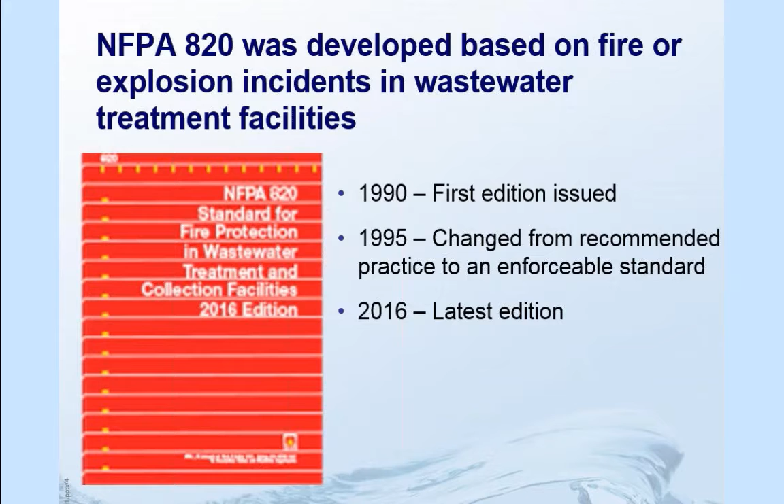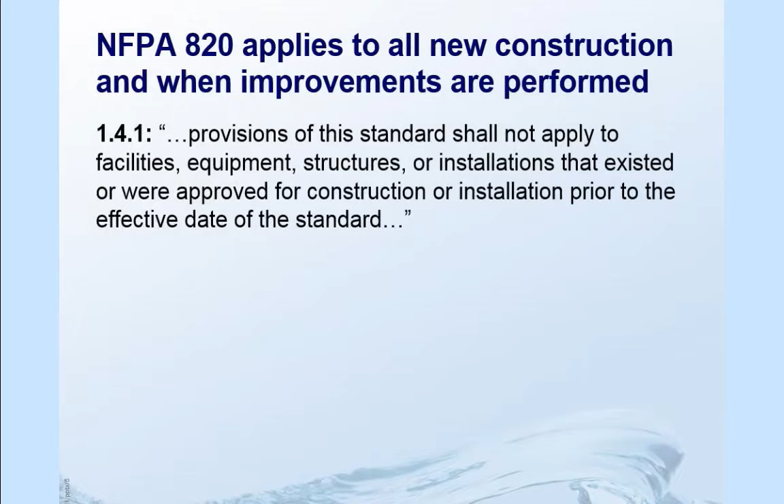So how does NFPA 820 apply, or where does it apply? It is applicable for wastewater treatment facilities and collection systems. But when does it apply? It applies to all new construction and when improvements or modifications are done in a certain area. If you look at Article 1.4.1 of the standard, it says that the provisions of the standard shall not apply to facilities, equipment, structures, or installations that existed or were approved for construction or installation prior to the effective date of the standard. So anything that was built before when the standard was made a standard, NFPA 820 does not apply. And any new work, any new design or construction work that we do now in wastewater treatment and collection facilities, this standard applies. However, there is a little caveat to that.

The authority having jurisdiction may apply any portions of NFPA 820 retroactively. There is an article, 1.4.2, in the standard that says in those cases where the authority having jurisdiction determines that the existing situation presents an unacceptable degree of risk, the authority having jurisdiction shall be permitted to apply retroactively any portions of the standard deemed appropriate. So the authority having jurisdiction for a certain wastewater treatment plant could be the fire marshal of that area, and that fire marshal could look at a certain area inside your wastewater treatment plant and say there is an unacceptable degree of risk in this area, and require improvements to improve safety. So it definitely applies to new construction and new design work, but it can be enforceable on existing structures or existing process areas.

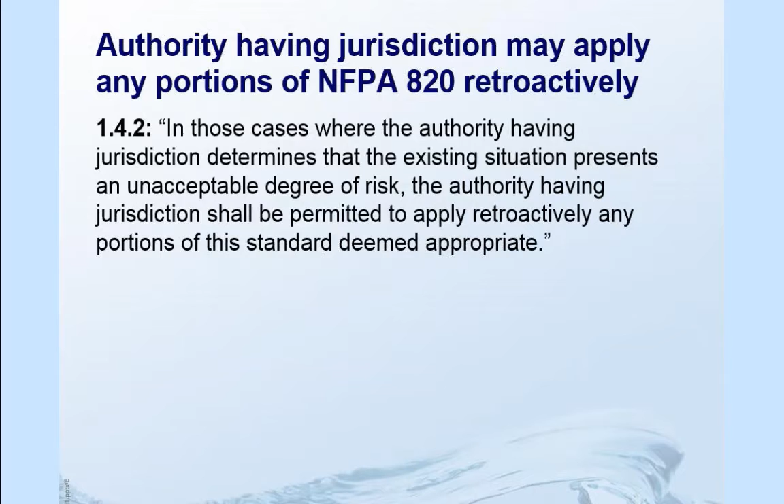So what does NFPA 820 do? The basic function of NFPA 820 is to classify the elements of wastewater treatment and collection facilities. Classify meaning they assign it to a certain class. There are tables in the standard that help you identify the classification of a certain area. So NFPA 820 provides the hazard classification of specific areas and processes at wastewater treatment plants and their associated collection systems.

And what do you do with that classification then? What NEC does is establish the requirements for equipment in different classifications, to minimize hazards, the electrical equipment must be designed in accordance with NEC requirements. So you establish a certain area, say a sludge pump station. What is the classification? After you establish that, you would use NEC to see what are the requirements for the electrical equipment that should go in that area.

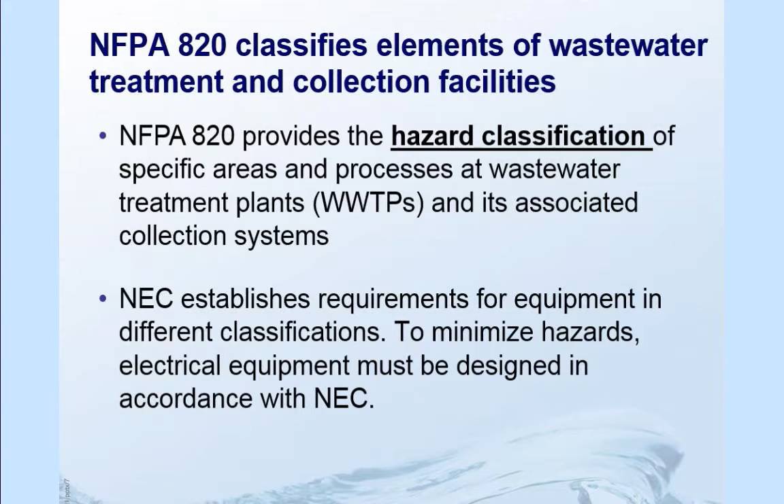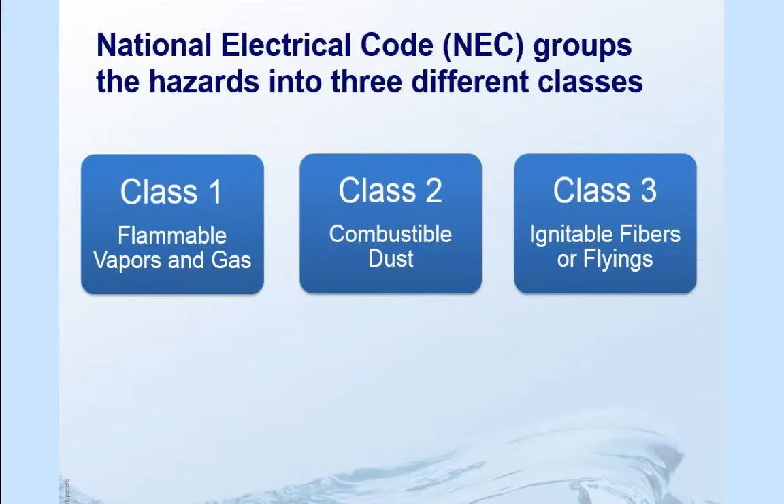So the National Electrical Code groups the hazards into three different classes: Class 1, Class 2, and Class 3. Class 1 deals with flammable vapors and gases. Class 2 is concerned with combustible dust. And Class 3 is all about ignitable fibers and flyings.

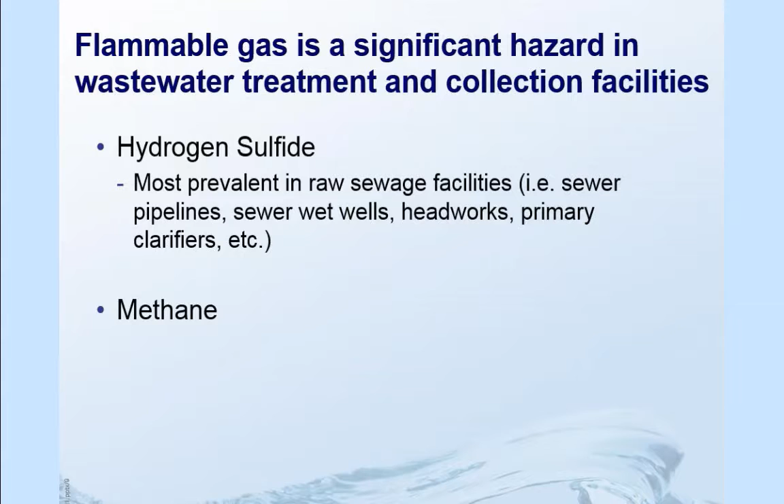Flammable gas is a significant hazard in wastewater treatment and collection facilities. There are two primary flammable gases we encounter: hydrogen sulfide and methane. Hydrogen sulfide is most prevalent in raw sewage facilities like sewer pipelines, sewer wet wells, headworks, and primary clarifiers. Methane is most prevalent in sludge handling and digestion facilities like digesters, sludge thickeners, and sludge storage tanks.

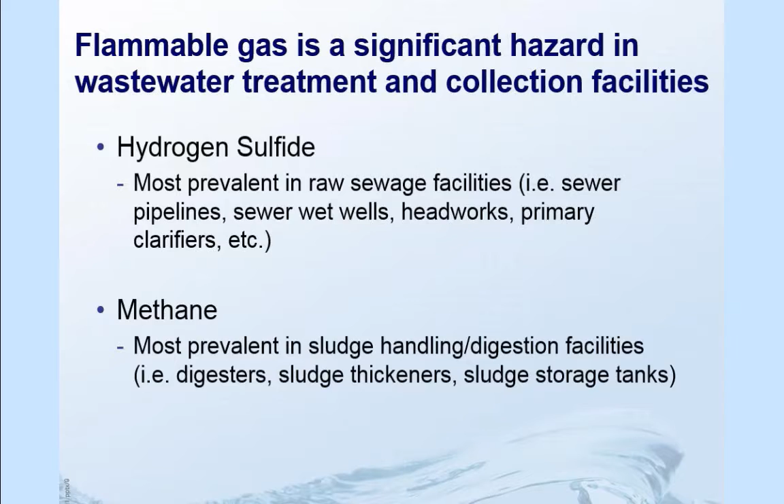Since flammable gases are the major hazard in a wastewater treatment plant, Class 1 is the primary category for wastewater treatment facilities. So the spaces in wastewater treatment and collection facilities fall primarily under Class 1.

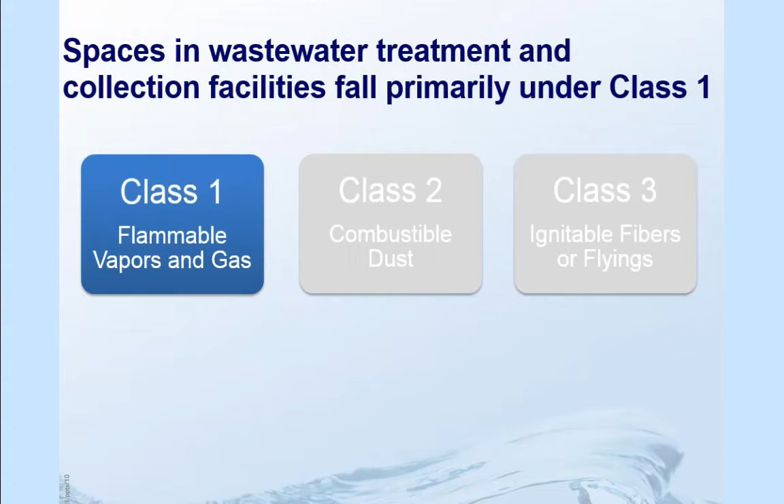Then NEC further classifies Class 1 into three divisions: Division 1, Division 2, and unclassified. Anything where the hazard is present during normal plant operations is put under Division 1. Division 2 includes hazards present during abnormal plant operation—like normally nothing's a hazard, but if there's an abnormal event, like a leak at a valve, the gases coming out of that leak could create a hazardous situation. Those areas are put in Division 2.

And then there are areas that are unclassified because they don't present any hazard during normal operation. So going through NFPA 820, you would see every process area is classified as Class 1 Division 1, Class 1 Division 2, or unclassified. You will see these three terminologies repeated throughout the NFPA 820 standard.

Then NEC establishes requirements for electrical equipment for these classes. If an area is Class 1 Division 1, you would have to use explosion-proof enclosures, and you would need conduit seals at the interface between classified and unclassified areas. If a conduit is crossing from an unclassified area to a classified area, you would need a conduit seal there. Similarly, for Division 2, there are some specific requirements.

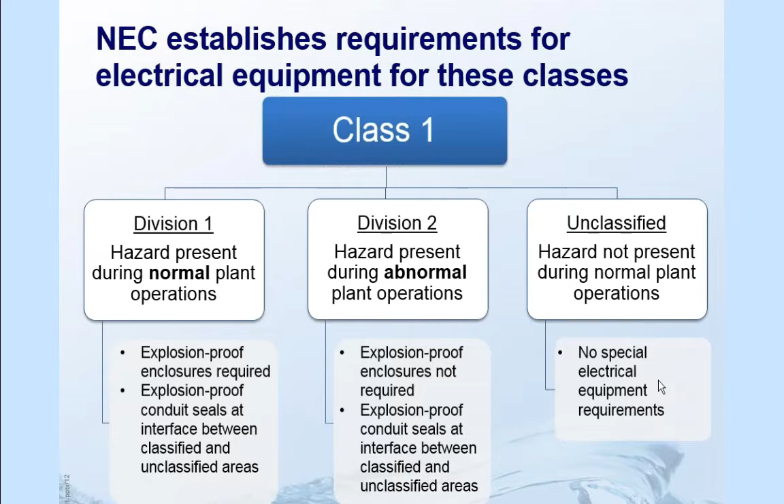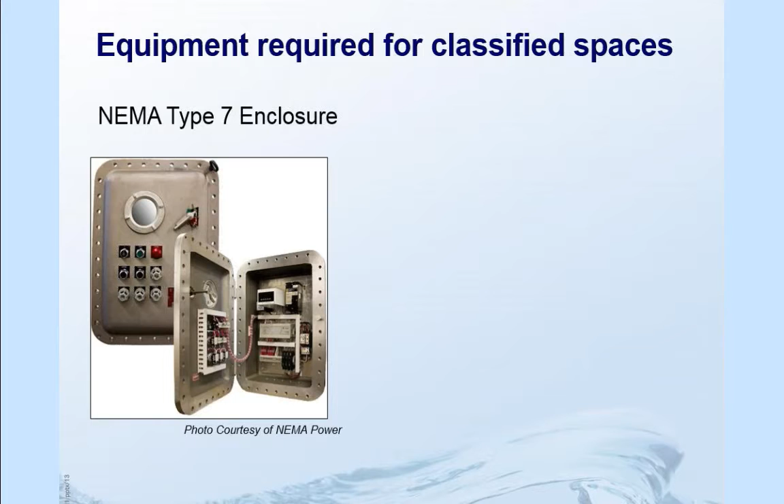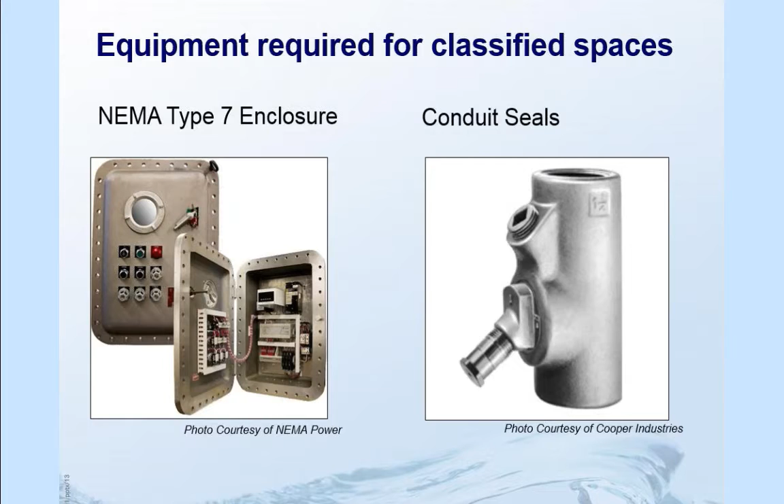This slide shows the equipment that would be required for classified spaces. The photo shows a NEMA Type 7 enclosure, which is an explosion-proof enclosure. The design allows an explosion of a certain intensity to be contained within the enclosure and not leave it. There is also a picture of a conduit seal—this is the seal you would put on conduits when they cross areas of two different classifications, from a classified area to an unclassified area, so that gases don't travel inside the conduit from one area to the other. They're sealed off.

So how do explosions or fires occur? For an explosion or fire to occur, flammable gas and vapor concentrations must be within its lower explosive limit and upper explosive limit, combined with an ignition source.

Lower explosive limit is the concentration of flammable gas or vapor in air below which the gas atmosphere is not explosive. Similarly, the upper explosive limit is the concentration above which the gas atmosphere is not explosive. So the gas concentration in the atmosphere has to be between these two limits, and there has to be an ignition source for an explosion to occur.

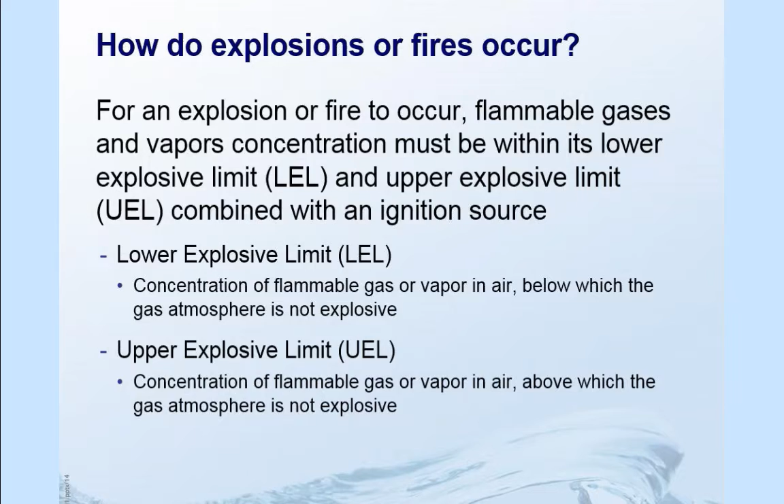Explosive limits of certain gases and vapors commonly found in wastewater treatment plants are shown on this slide. There are four commonly found gases: hydrogen sulfide, natural gas, sewer gases, and sludge gas. The second column shows the lower explosive limit, and the third column shows the upper explosive limit.

For example, with hydrogen sulfide, if the concentration in the atmosphere is between 4 and 44, say 10, and if there is an ignition source, then there is a possibility of an explosion.

A couple things about the sewer and the sludge gas. The sewer gas is defined by the US EPA as gas that contains 5% methane and 25% other gases. Sludge gas is defined as gas that is 65% methane and 5% other gases.

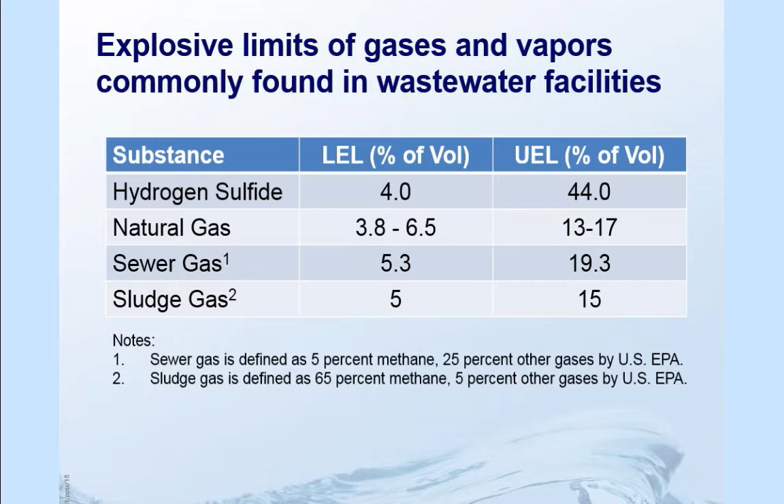So what are the typical sources of ignition in a wastewater treatment facility? There are sources that are from the equipment itself, and there are from maintenance activity.

From equipment, it could be hot surfaces, like boilers, generators, engines, or stray electric currents from conductors, wires, and switches, or sometimes mechanically generated sparks from movement of mechanical pieces like actuators, grinders, and pumps. And maintenance activities...

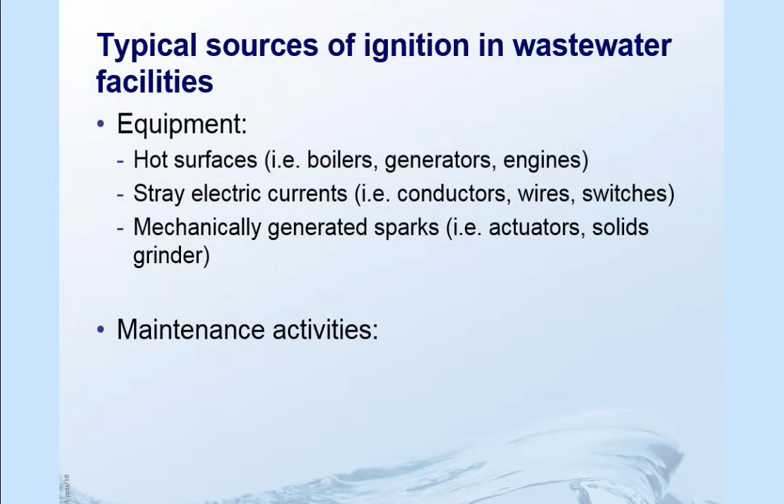like sparking tools or static electricity could actually create an ignition. So the gas concentrations put together with the source could be a hazard, could produce an explosion.

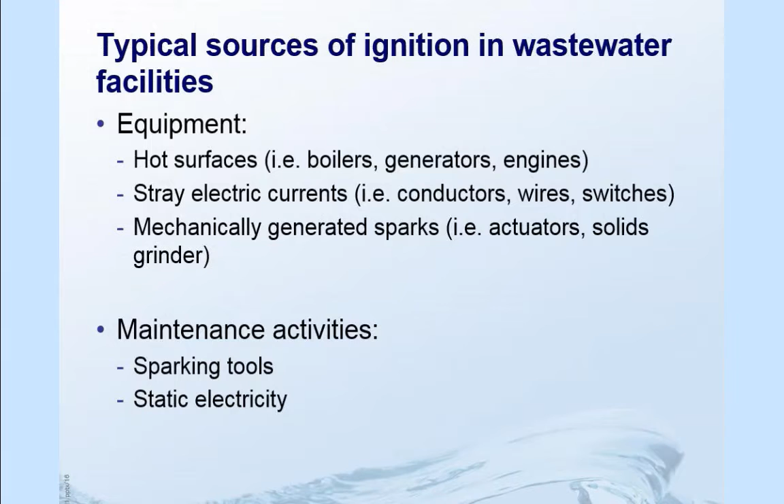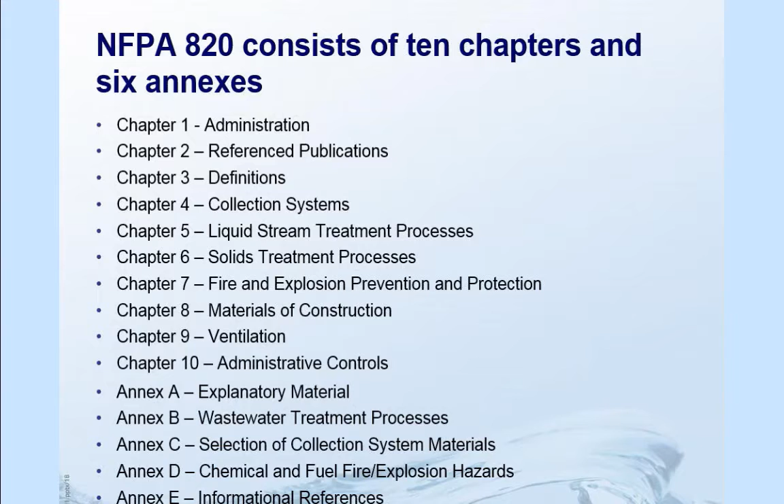Chapter 4 deals with collection systems. Chapter 5 deals with liquid stream processes. Chapter 6 with solid treatment processes. Chapter 7 is about fire and explosion prevention. Chapter 8, materials of construction; 9, ventilation; and 10, administrative controls.

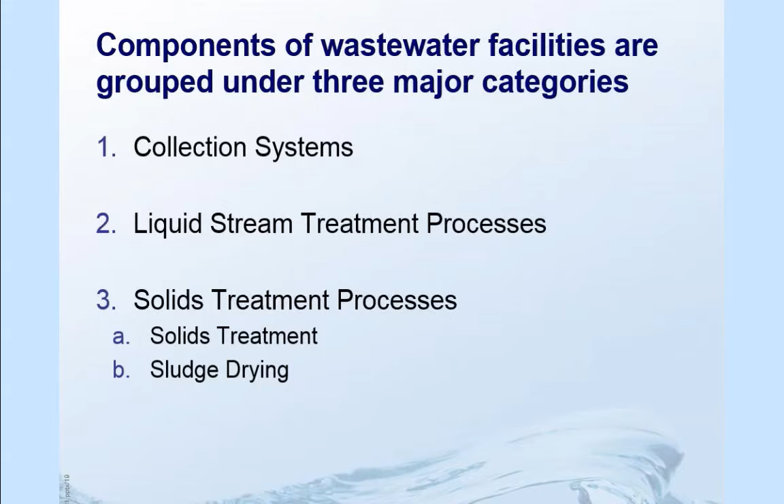So as you saw from the table of contents, the components of wastewater treatment facilities are grouped under 3 major categories by NFPA 820. They are grouped as collection systems, group 2 is liquid stream treatment processes, and group 3 is the solid treatment processes. Under solids treatment, it is further divided into solids treatment and sludge drying.

So what is included in the collection system? Collection system includes off-site facilities related to wastewater, that is stormwater and sewage collection and transport systems. So these would be your wastewater sewer lines, wet wells, lift stations, and structures like that, outside the fence of your plant in the collection system.

And table 4.2.2 of the standard covers collection system components.

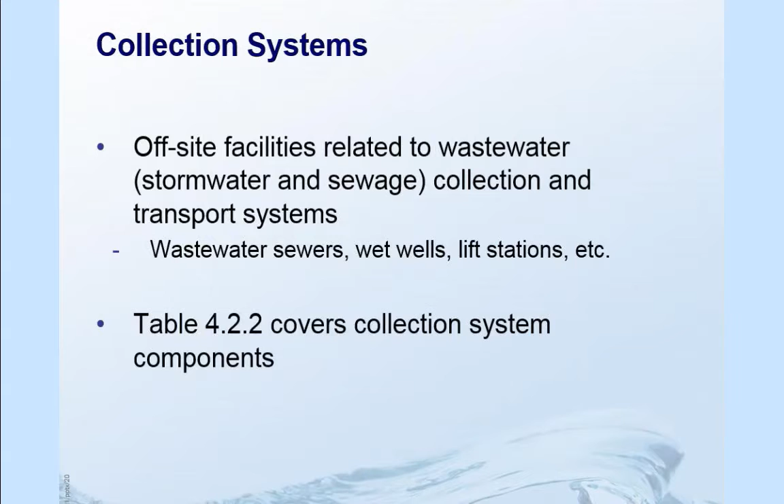Then the second group is the liquid stream treatment processes, which includes on-site facilities related to wastewater liquid treatment. So this would be structures or processes inside the treatment plant fence, which would be the headworks or the EQ basins or the primary treatment or the secondary treatment trains. All these structures that deal with liquids treatment inside a treatment plant are dealt with under the liquid stream treatment processes. And table 5.2.2 of the standard covers liquid treatment system components.

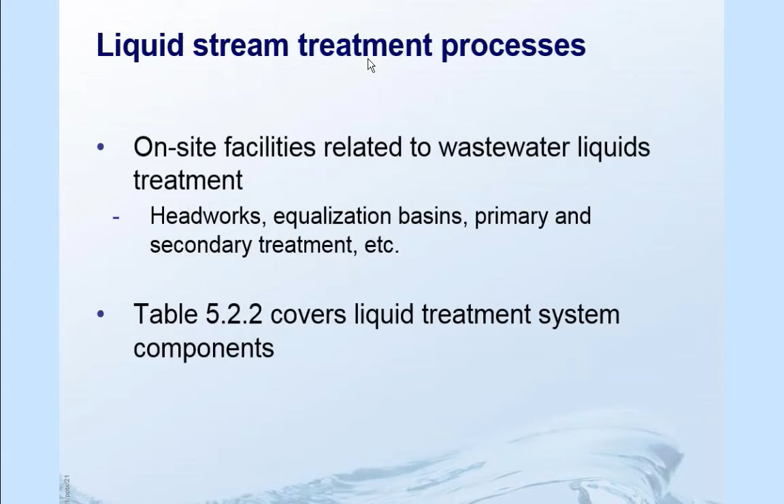And the third group is the solid treatment processes, which includes on-site facilities related to wastewater solids handling and treatment. So these are your treatment processes that deal with the solids, such as the grit and scum handling from the headworks, the primary and secondary sludge, your digesters, or any gas handling systems used in solids treatment processes. And then it also includes the sludge drying and sludge storage areas.

And table 6.2.2a deals with solids treatment components, and 6.2.2b covers sludge drying components.

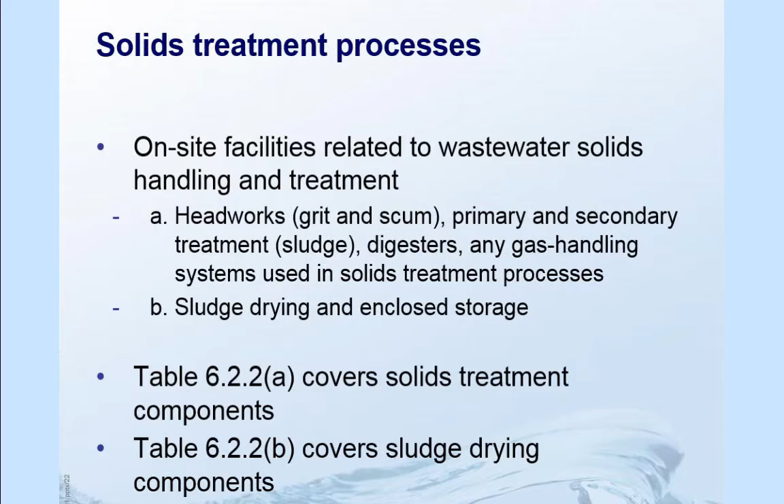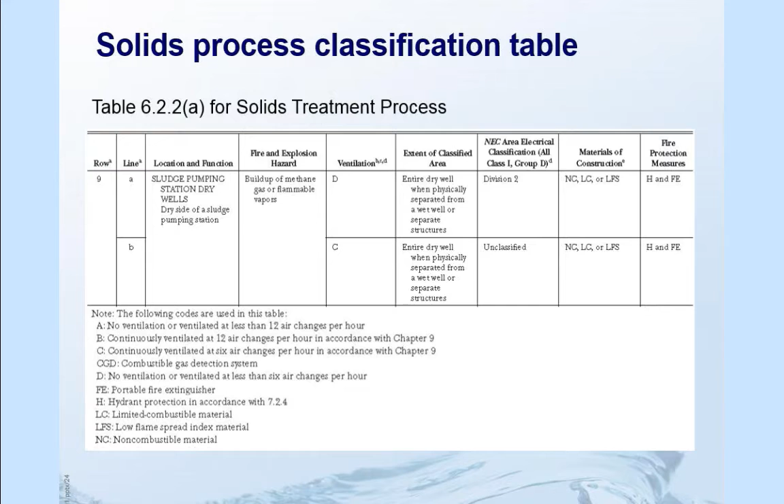So what you would do is you would start with the area that you are concerned about. It depends upon the location and function of the area, so you will select the applicable row. If you go back to that table, there are rows for different areas. This happens to be for the dry side of the wet well. There is this area for maybe the wet side of the wet well.

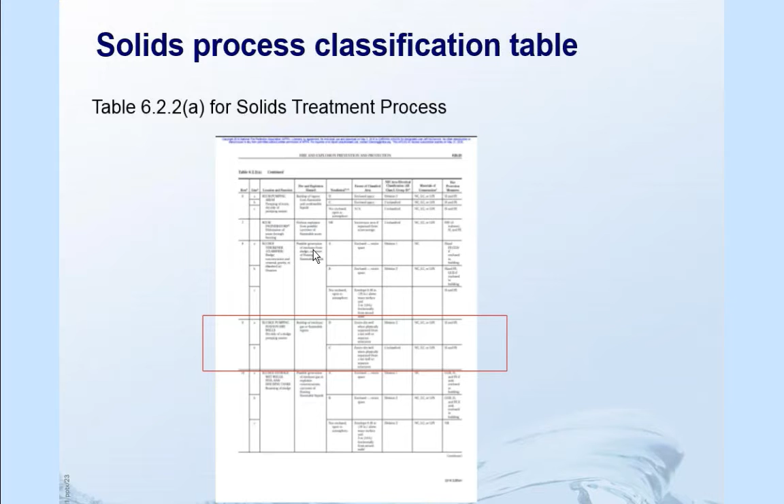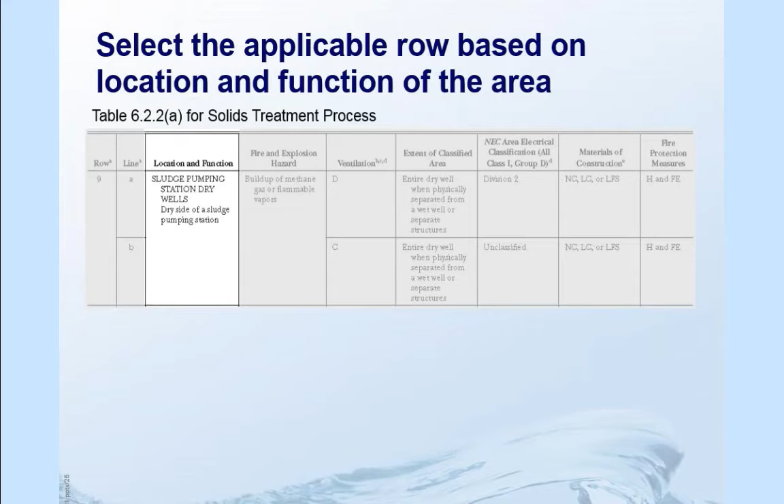And this area is for primary maybe digester, right? So because it deals with the solids, you have to go to the table and find the right row based on what is that area's function. In this case, it is the dry side of a sludge pumping station. And then after that, the next step would be to figure out the ventilation requirements.

Ventilation is basically calculated as air changes per hour in the NFPA 820 standard. If you see this table down here, this is the code they use for different ventilation systems. If there is no ventilation, or if it's ventilated at less than 12 air changes per hour, it's A. B is anything continuously ventilated at least 12 air changes per hour. C is continuously ventilated at least 6 air changes per hour.

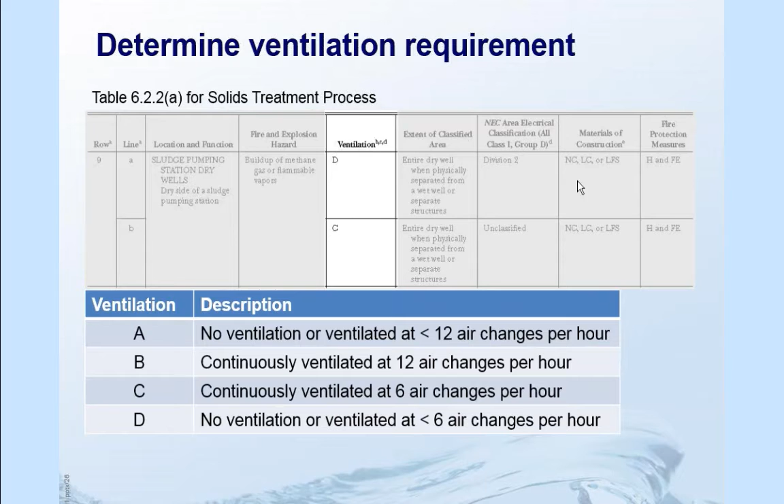And D is there's no ventilation, or if the ventilation is less than 6 air changes per hour. So if you are designing a new system, you would pick what you need to design the ventilation system for. Maybe you decide you want less than 6 air changes per hour, then you use that row. And if you decide you will provide at least 6 air changes per hour, then this row applies. In cases where you are assessing an existing facility, you would calculate your existing air changes and see where it fits. Say if you have a sludge pump station dry side, and you calculated only 4 air changes per hour based on the existing ventilation system, then you would be using this row, and the requirements of this row will apply to that area.

One thing to note is that the ventilation requirements in NFPA 820 do not address the personal protection from toxic effect of exposure to gases. They solely deal with the explosion hazard, not the toxic effects to personal exposure at all. So these air changes are only to minimize the explosion hazard, nothing to do with personal exposure.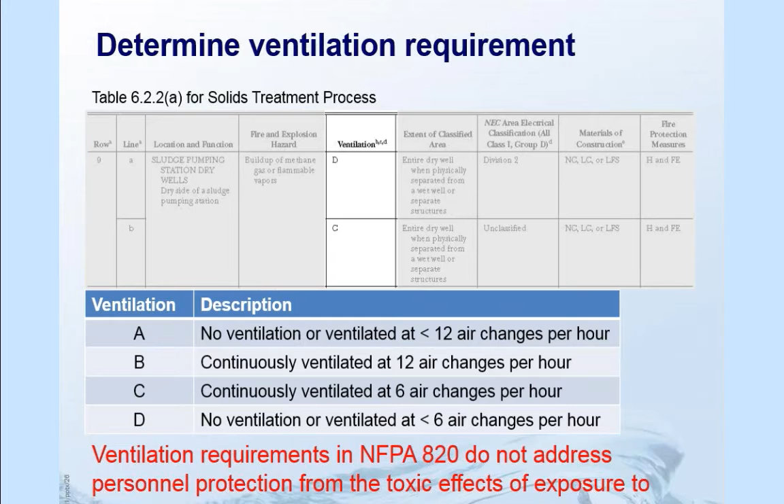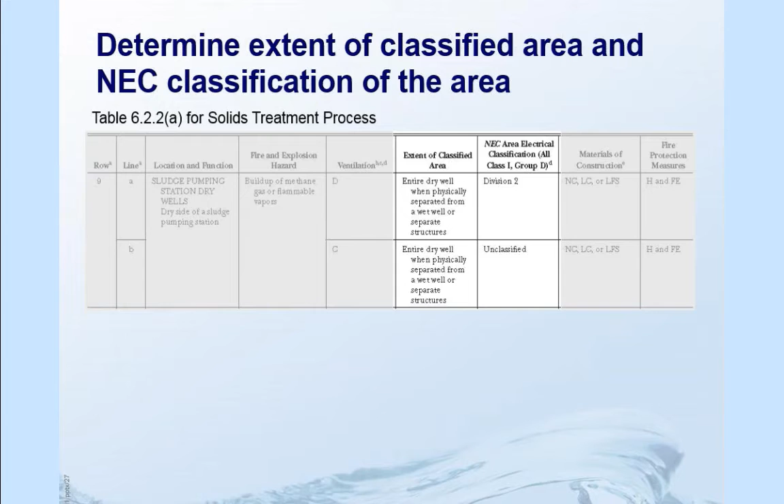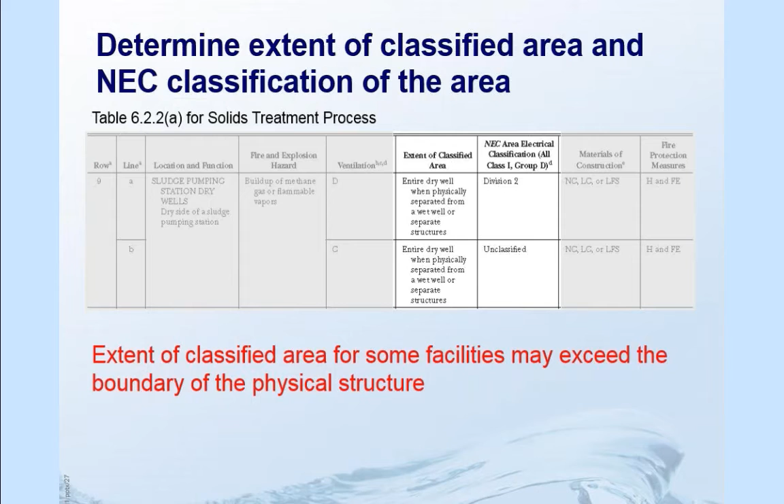Next, an important thing to note is that the extent of classified area for some facilities may exceed the boundary of the physical structure. So in this case, the entire dry well is either Division 2 with ventilation D, or unclassified with ventilation C. But there are instances, there are structures where the extent of the classification area actually exceeds their physical boundary, going beyond the structure.

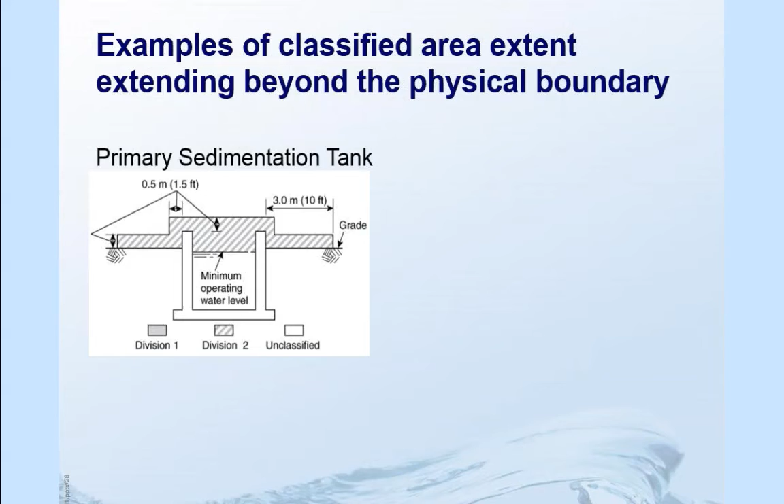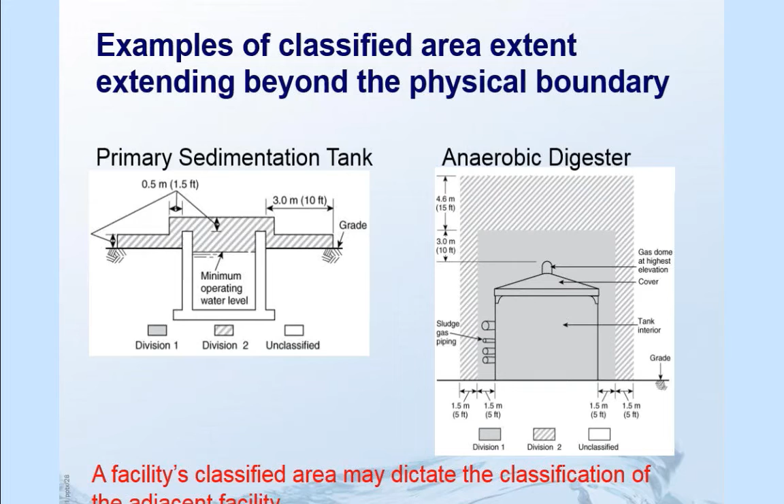So basically, what would happen here is a certain treatment process or facility's classified area may dictate the classification of the adjacent facility. So that is something to watch for. There is an interaction because in a treatment train, structures are laid pretty close to each other, so it could happen that one structure can influence the classification of the next structure.

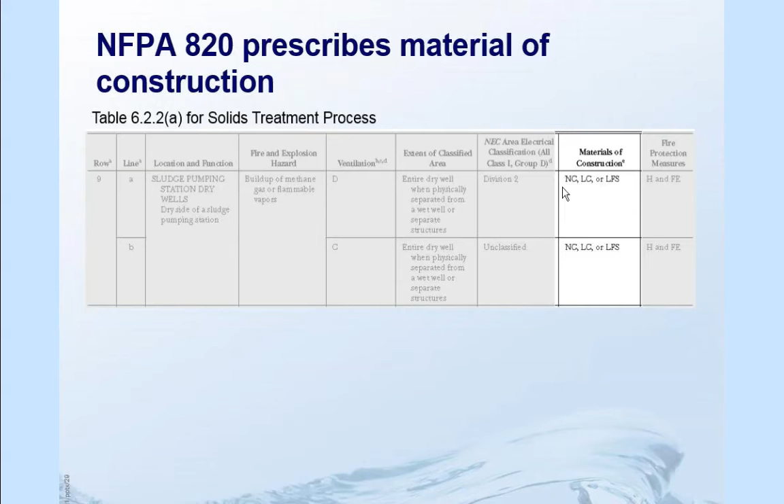And the second last column, NFPA 820 prescribes the material of construction. It says what should be the material of construction. It has to be non-combustible, low combustible, or low flame spread material. You can use any of these materials, both, it doesn't matter what type of ventilation you have. It looks like from this table, any sludge pumping stations, dry wells should be constructed of these materials.

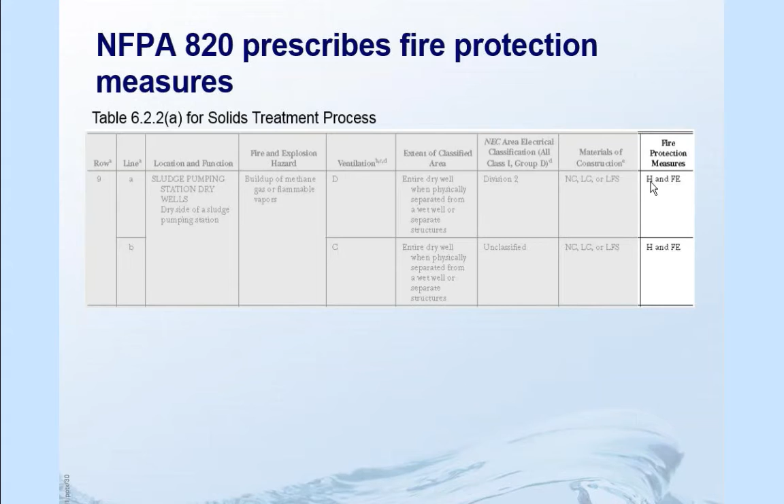And NFPA 820 also prescribes fire protection measures. From this table, for the sludge pumping station dry wells, it looks like you have to provide a hydrant and a fire extinguisher. It doesn't matter what ventilation you're providing, you have to provide a hydrant and a fire extinguisher.

So let's talk about a case study now. Like I said in the beginning, we do look at this NFPA 820 standard whenever we design anything new. If it's a new construction or even if it's a modification to an existing structure, if we are putting in new electric equipment, we have to look at the standard and design appropriately.

But in some cases, some of our clients have actually approached us to look at their entire treatment plant and identify any deficiencies or safety concerns, areas that did not meet the current NFPA 820 standard. So this is a case study of a client located in Central Marin County, California, in the San Francisco Bay Area, CMSA. This is a wastewater agency. They started operating in 1985, and their average plant capacity is about 10 MGD.

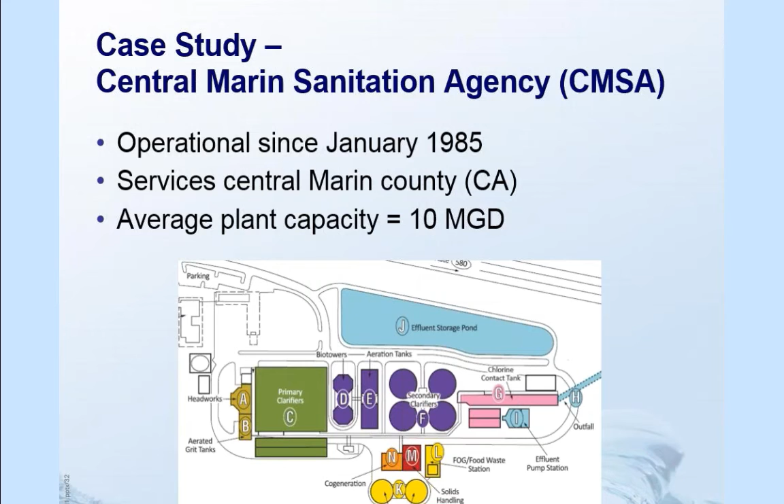So they approached us and said, can you look at our entire facility and identify areas of concern, if any. So in 2014, we were hired to do this assessment and to recommend ventilation improvements throughout the wastewater treatment plant.

So one way to improve the safety for NFPA 820 is basically ventilation. Ventilation moves the flammable hazardous gases out of the area, and the more you ventilate, the lower the risk. So you can actually improve classification. There are instances or listings in the table where a Class 1 Division 1 area can be made a Class 1 Division 2 area by increasing the ventilation.

Like you saw in the example of the pump station wet well, if it was ventilated less than 6 air changes per hour, it would be Class 1 Division 2. But if you bump up the ventilation to 6 air changes or more, then you're unclassified. So the agency said to identify areas that could be improved if they currently are not unclassified.

And so when we completed the study, we identified several improvements which were recommended to the agency. So over the next few slides, I would talk about the common theme we saw in some of their areas, the common deficiency, the common issue.

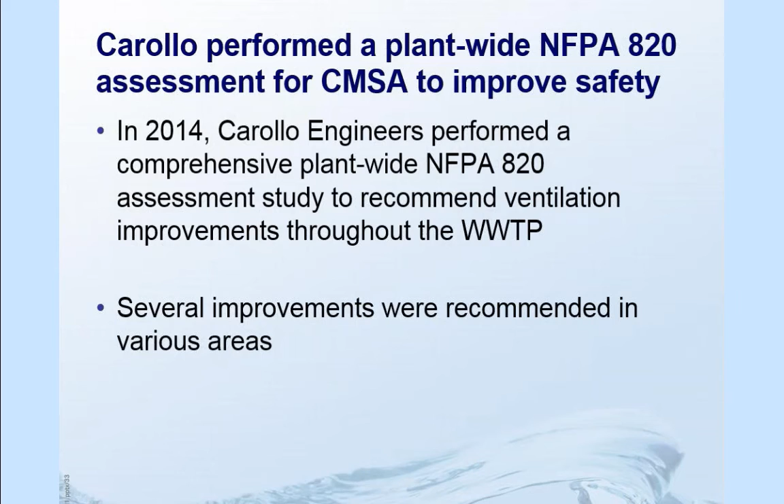So the first one was the ventilation system. In some areas it did not meet the requirements of section 9.2.4. Section 9.2.4 basically says all mechanically ventilated spaces shall be served by both supply and exhaust fans. So to ventilate an area, you should have a fan to supply air and a fan to exhaust the air. And the issue in some of the areas at CMSA was they had forced exhaust only in areas. Passive louvers were used in these areas for air supply.

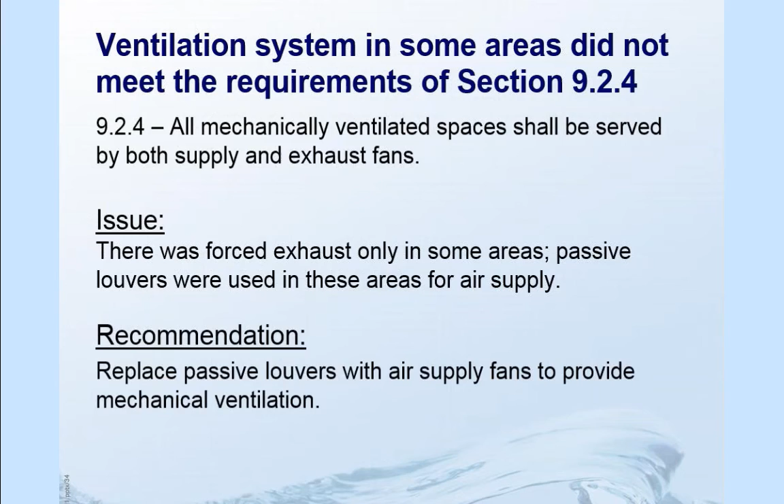So they were missing a supply fan, an air supply fan. So the recommendation basically was to replace the passive louvers with an air supply fan to provide mechanical ventilation. And doing this study for our various clients, we have found similar issues with their facilities also. There was a practice back in the 70s and 80s, I guess, where supply fans were typically not provided, and louvers were used to supply air into the room. But the code currently requires that you have to force supply the air and not just rely on louvers pulling in the air because the exhaust fan is pushing the air out.

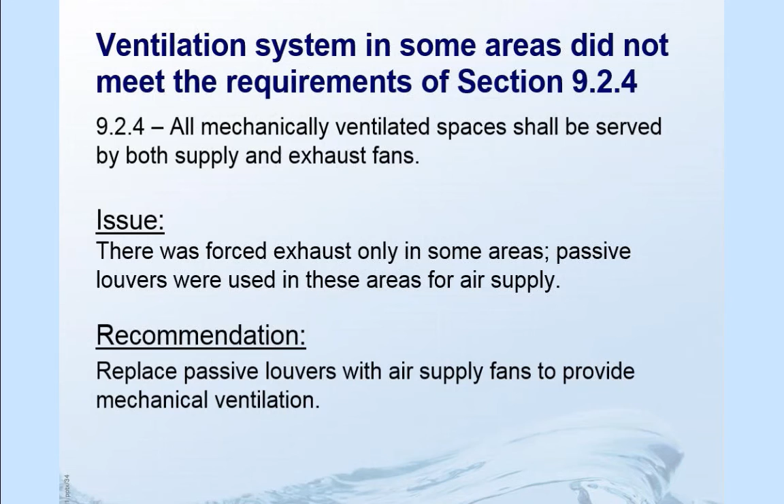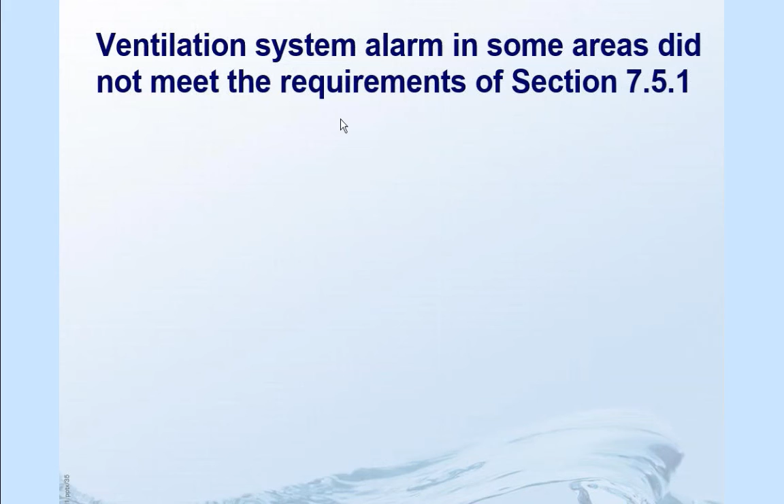Another common theme we found across most areas was the ventilation system alarm. In some areas, it did not meet the requirements of section 7.5.1. That section says all ventilation systems used to reduce the classification of a space shall be fitted with flow detection devices connected to alarm signaling systems to signal locally and remotely to indicate inadequate ventilation and ventilation system failure.

So the issue we found was that in some cases there was no instrumentation to alarm if somebody turned off the ventilation system or if it stopped working.

The standard really requires the ventilation system, for certain classifications, to keep hazardous gases out. So if the fans stop working, gases start accumulating in that area, and that's not good for the equipment—it's actually exceeding what the equipment was designed for. The atmosphere is not the right atmosphere at that point.

So it's really important that if you're using a ventilation system to declassify or lower the classification, like in the case of the sludge pump station dry well—if we say we'll provide 6 air changes per hour and the area will be unclassified, then we won't have to provide equipment suitable for class 1 div 2. But if you turn off the ventilation system, you no longer have those 6 air changes per hour. So the classification of that room changes to class 1 div 2, but you have equipment that is not suitable for class 1 div 2.

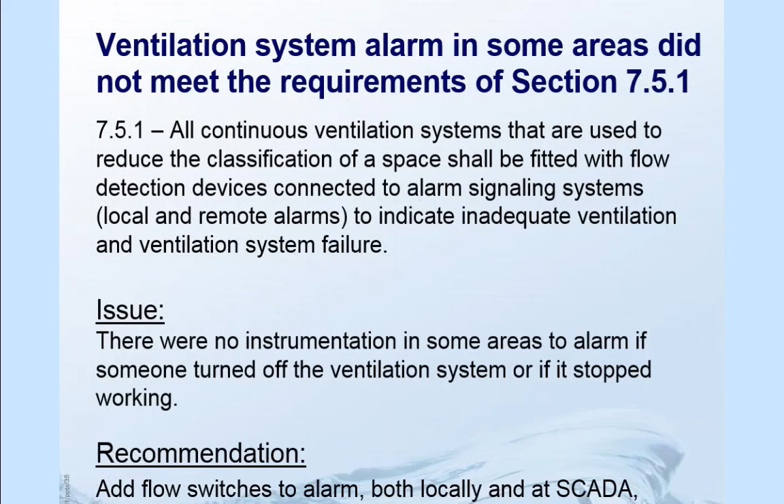Our recommendation for CMSA and other agencies we worked with on similar studies was to add flow switches and wire them up to their PLC, providing an alarm at the SCADA, as well as a local alarm saying the ventilation system failed and there is no ventilation in that room anymore.

Another commonly found issue was the source of supply air in some areas not meeting the requirements of section 9.3.1.1. That section says air changes per hour shall be based on 100% outside supply air, which shall be exhausted. So the air used to calculate your air changes per hour should be 100% outside supply air from the atmosphere.

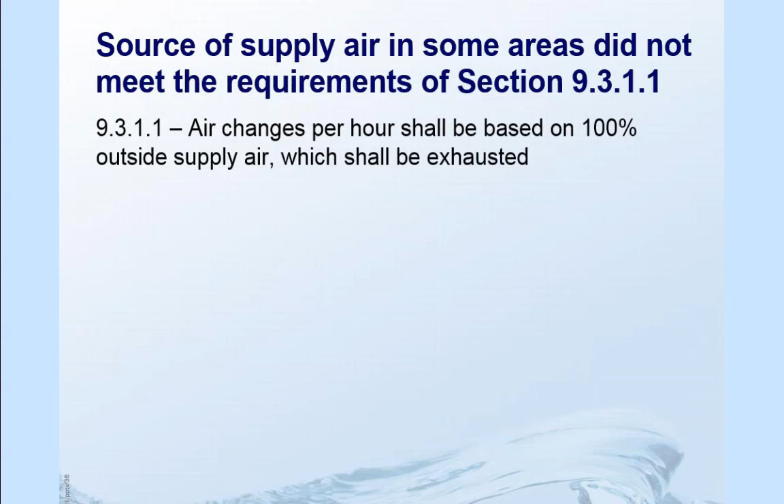What we found was that in some areas, the ventilation system intakes were located within the class 1 div 2 envelope of an adjacent area. The structures were so close by that the intake happened to fall inside the class 1 div 2 envelope of the neighboring area.

So some areas did not satisfy the requirements of 9.3.1.1. Basically, that means you're actually pulling in the gases being exhausted by the other area—you're not bringing in fresh air to purge your room, but hazardous air, and you might end up concentrating the gases in that room.

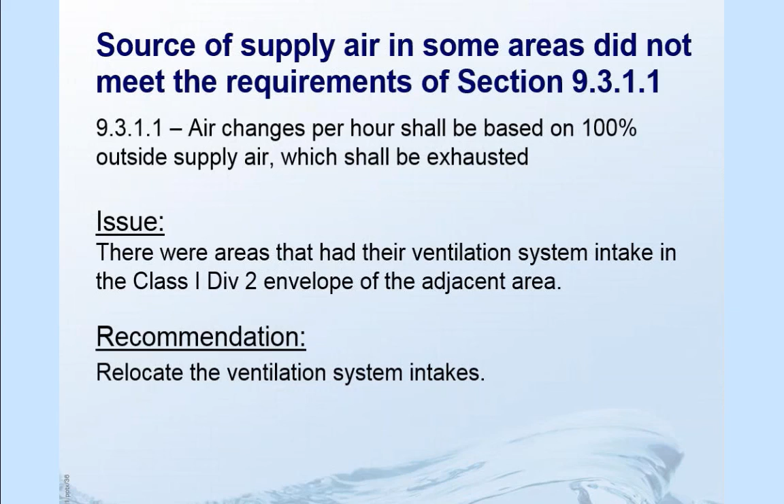The recommendation was very simple: relocate the ventilation system intakes to a location not influenced by the classification envelopes of adjacent areas, but where they would actually pull in plenty of fresh air—100% fresh air as required by standard section 9.3.1.1.

Before we get into questions, there are other NFPA 820 requirements I haven't mentioned, like every ventilation system larger than 2,000 SCFM should have smoke and fire dampers, or that ventilation systems should be supplied with a standby power system—a second power source that switches automatically if the primary fails. Mostly, the agencies we helped assess already had those features built in and were good on that part.